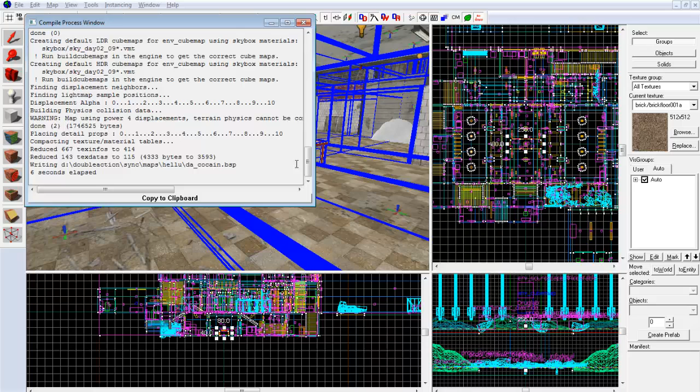They don't create portals, which is fine, because a person standing on one side of the table is not going to be blocked to a person standing on the other side of the table. They can see each other, they can shoot each other, they're essentially in the same room. And so if we make this table a detail, then we rebuild the map, which takes a few seconds, and then we come here to the map menu and load portal files. That's what shows all these blue lines. That shows the portal files.

Then you can see there are many fewer portals in this room, and so this room is going to be a little bit more optimized. Same thing with this column here in the distance. Someone standing on one side of the column versus another side, they're still in the same room, so we're going to make this a Func Detail. Same thing with this column. Same thing with these two columns.

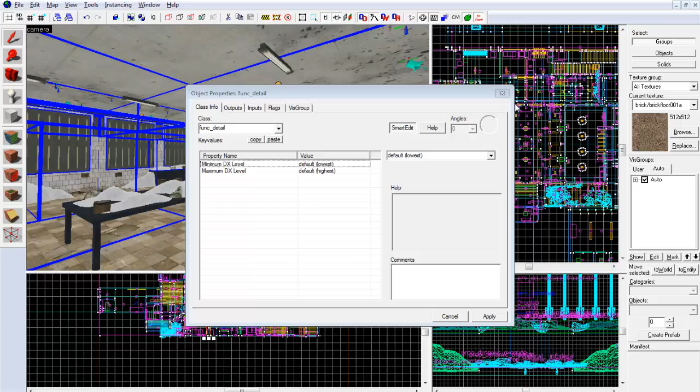And when we're done with this process, you're going to see how many fewer portals there are in this room, and you're going to be amazed. By the way, if you have any leaks in your map, it will not generate a portal file. I'm not going to cover how to remove leaks. That's another video. Maybe I'll link a video. But you must eliminate leaks in your map, or it won't show a portal file.

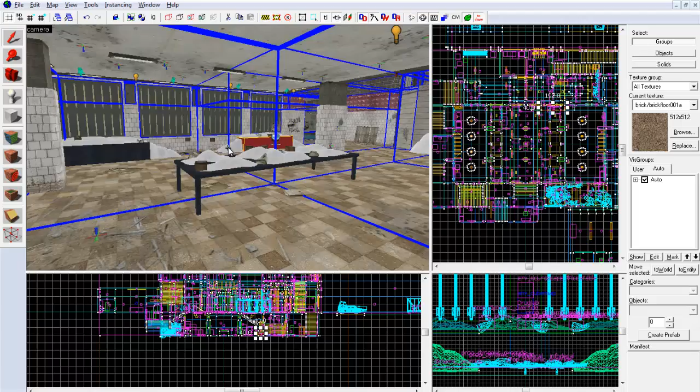There we go. So now notice how we have only very large sections of this room. So this room is much better optimized now. Let's come over here to where there are these stairs. Stairs are always a huge problem with portals. Look at how many portals they created. So I'm going to come and click on the stairs, and actually, oh, come on, there we go.

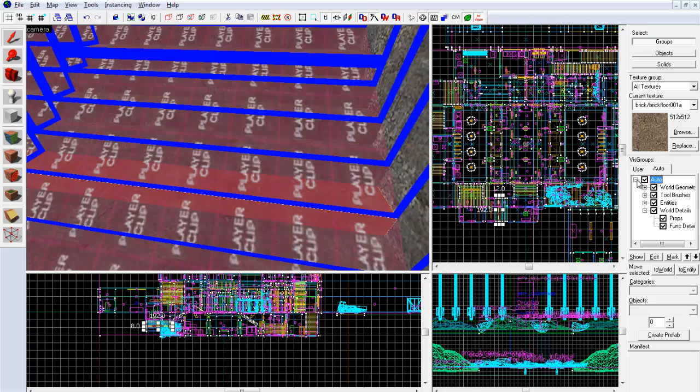I have to remove this player clip brush so that I can see, and then I'm just going to click each individual stair, not the top one, and make it a Func Detail. And then if I hide the Func Details, you can see that what I've done is I've created a leak in the map. I can walk right out of the map. I can fly right out of the map. That's a leak.

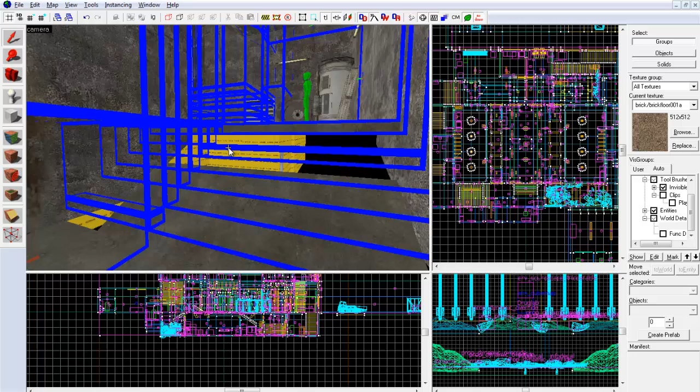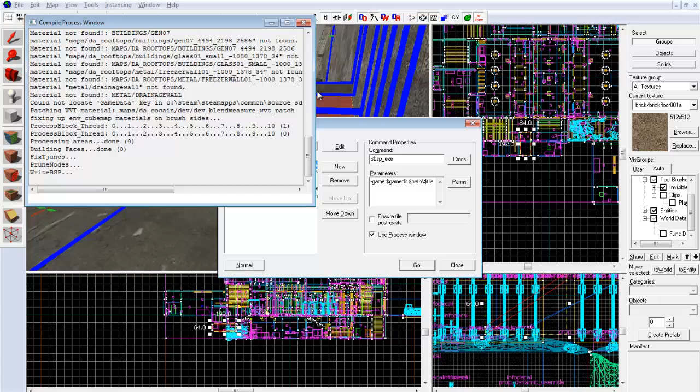And the Source engine dislikes leaks. Anything that is a func detail will not seal the map. It will create leaks. But fortunately, I've created this little brush right here. To seal the leak, all I have to do is move it up into place. There we go. Now, there will be no leak, and when I rebuild the map, we'll see how many fewer portals there are here. Was that a leak? No, that was just a bunch of missing materials, because this is not my map.

So now let's reload the portal file, and bam, portal's gone. Portal's gone. That's good, because all these little lines, if I'm in this spot here or this spot up here, it doesn't really matter. You're still in the same rooms. That's the way you should be thinking when you're trying to eliminate portal files. This will make the map run much more smoothly.

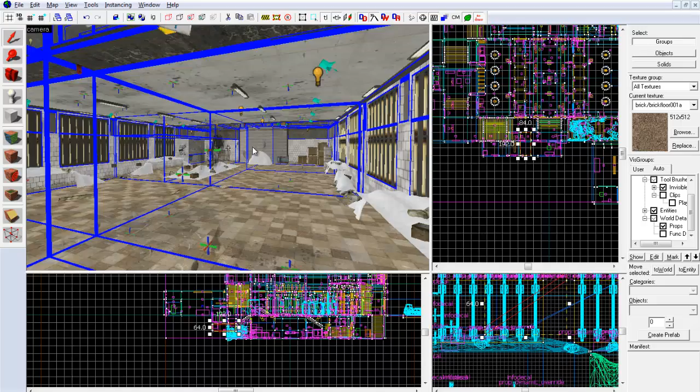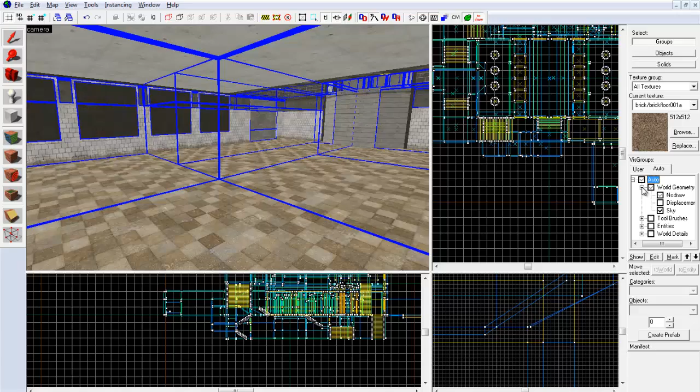And let me go to one more way of demonstrating what a portal file is. Over here on the right, you saw me using it before. These are the auto groups. And we're going to turn off anything that is not brush geometry. So all the world details, all the props, all of the entities, all the player clip brushes. What are these? Yeah, ladders. We turn all those off. And we turn off displacements, and we're left just with no draws. Turn off. No draws and skyboxes and world geometry.

Look how bare our rooms are. This is how the engine sees the game. So, you can see these stairs are the most detailed thing in the room now. This is going to trip the engine up. The engine wants big flat walls, simple rooms, so that it knows, okay, everybody in this room, they're all fighting each other, I'm gonna send that information to them. Anybody in another room, I'm not gonna send that information.

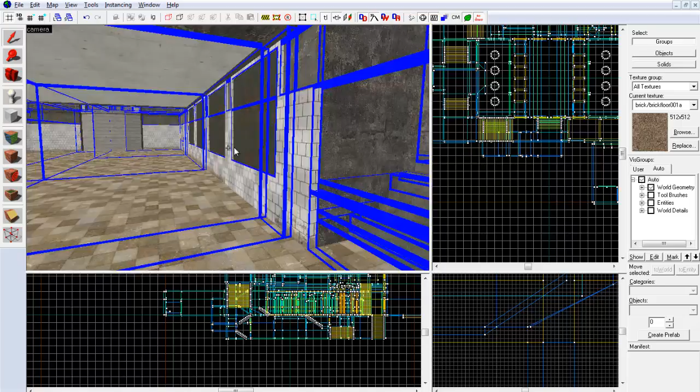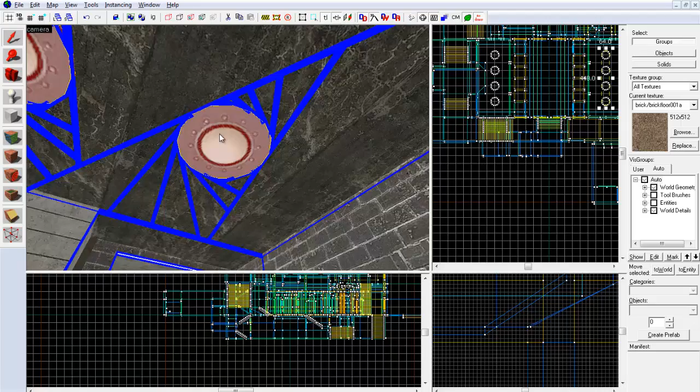So here are some more stairs creating portals. This little thing right here, being on one side or another of that's not gonna put you in a different room. We can make that a detail. Control T is the shortcut for making something a detail. It's pretty handy. So, look at that. Look at that. These things up here are big time cutting up the ceiling. We can make those func details.

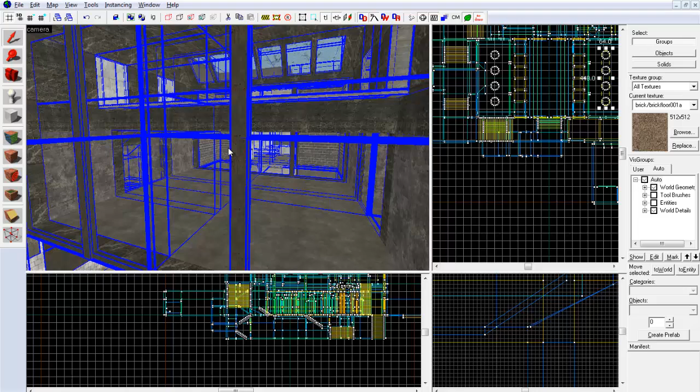So as a mapper, you have to think about your portals and be mindful. And go through your map and make sure that there aren't too many portals. This is good optimization, and once you've done that, your map is going to run a lot faster. It's going to be less laggy. The frame rate is going to go up. Everything's just going to be hunky-dory. So I hope that helps.